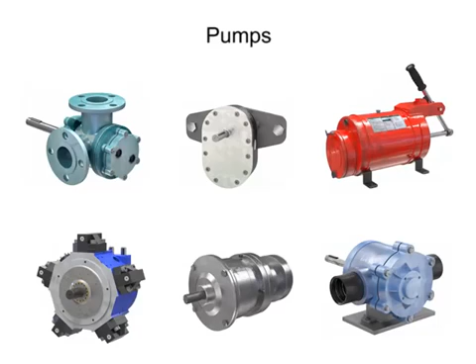Many different types of pumps exist to assist fluid movement in a variety of systems. An external gear pump uses two gears rotating against each other to provide fluid movement.

One gear is driven by a motor connected to a shaft. This is called the drive gear because it is driven by a motor, and it in turn meshes with and drives the movement of the second gear.

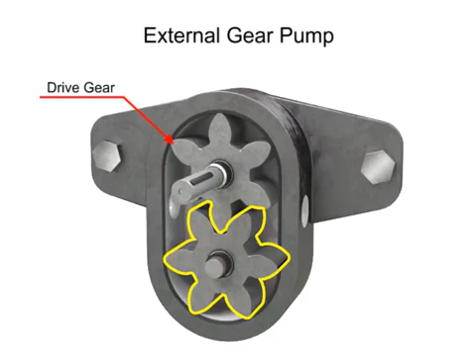As the gears rotate away from each other and come out of mesh, they create an expanding volume on the inlet side of the pump. This creates a vacuum at the inlet port, allowing fluid to flow into the pump.

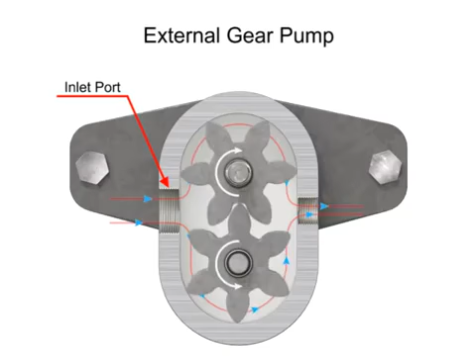Then fluid flows into the cavities and is trapped by the gear teeth. As the gears rotate, a flow path is created around the outside of each one. Fluid trapped in the slots between teeth is carried around and discharged into the cavity with the outlet port.

Meshing of the teeth in the center of the pump seals the outlet port from the inlet port. No fluid passes between the gears.

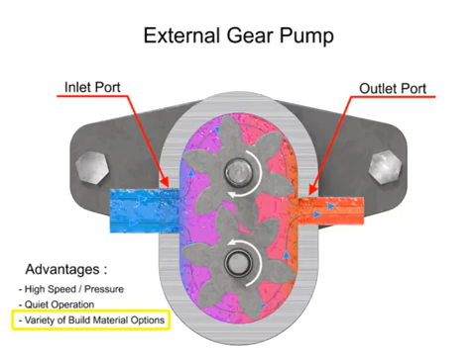The advantages of external gear pumps are their high speed and pressure, relatively quiet operation, and that their design accommodates a wide variety of materials. Disadvantages include bushings in the liquid area can become worn and that they have fixed end clearances.

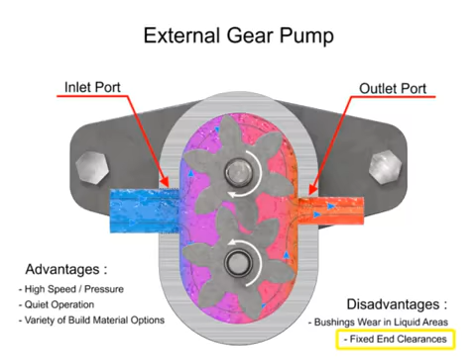Internal gear pumps are exceptionally versatile. This type of pump has one inner gear which is inside a second outer gear. The inner gear has a shaft driven by a motor and has teeth that protrude outward. The outer gear has teeth that protrude inward toward the center of the pump.

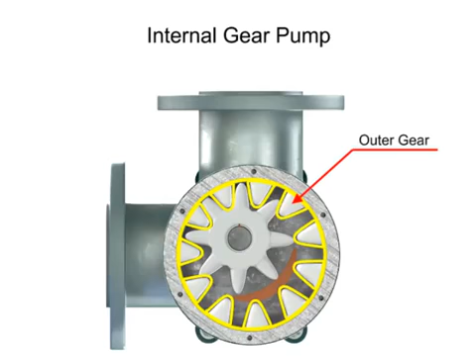As the inner gear rotates, it meshes with and moves the outer gear. Liquid is trapped in the gear spaces and carried from the inlet to the discharge. A stationary crescent-shaped divider separates the intake and discharge portions of the fluid.

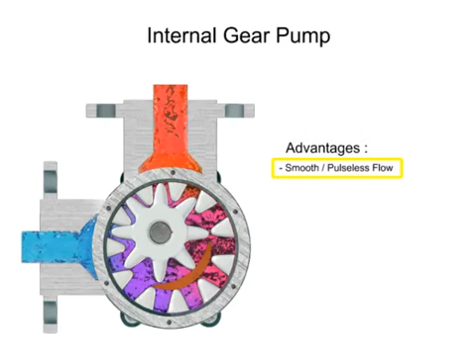Advantages of internal gear pumps are a smooth and almost pulseless flow, and slightly more horsepower for its size. Disadvantages are its higher cost, limited size range, low to moderate pressure ratings, and few sources of manufacture.

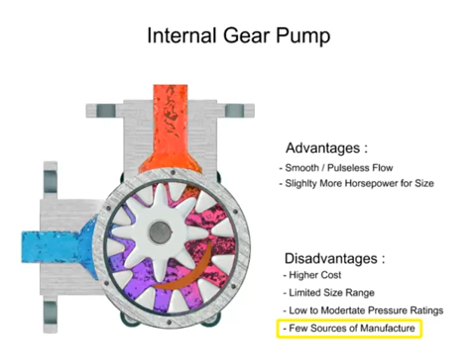A rotary vane pump is a positive displacement pump that consists of vanes mounted to a rotor. The vanes are on an off-center drive shaft. As the shaft rotates, the variable length vanes slide in and out to maintain contact with the pump housing.

The tension in the vanes is maintained by either springs or hydraulic pressure. As the vanes rotate, they create chambers of varying sizes within the pump.

Fluid enters at the largest chamber. As the vanes rotate and retract, the chambers get smaller, forcing fluid to exit through the discharge port.

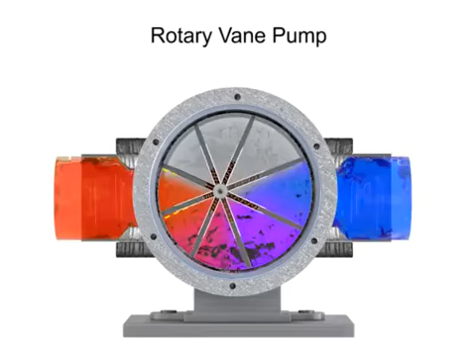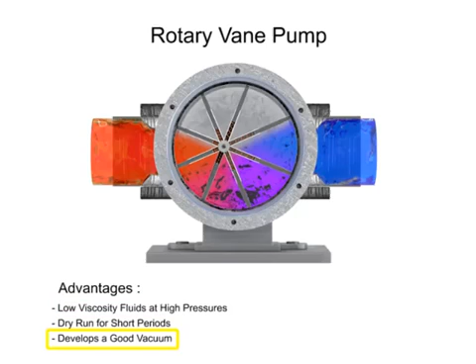The advantages of vane pumps are that they can handle low viscosity fluids at relatively higher pressures, can dry run for short periods, and develop a good vacuum. Their disadvantages include complexity and their unsuitability for both high pressure and high viscosity fluids.

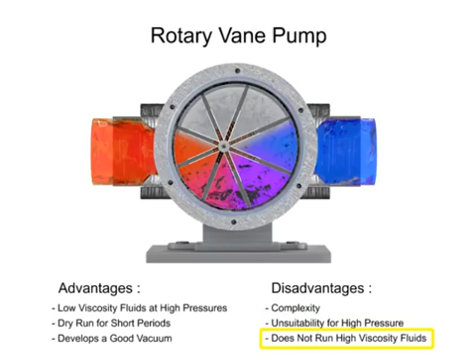Piston pumps come in many different forms. A swash plate is a device used to translate the motion of a rotating shaft into the reciprocating motion of a piston.

Swash plate piston pumps have a rotating shaft connected to a cylinder block containing pistons, which are pressed against a stationary swash plate that sits at an angle to the cylinder.

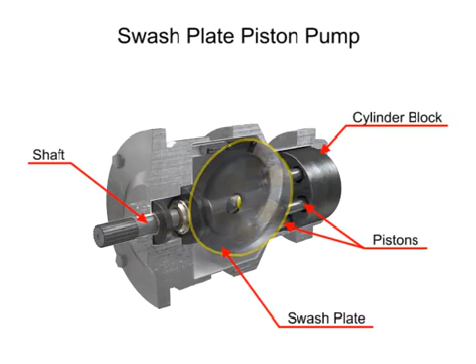As the shaft rotates, the pistons move against the swash plate, causing them to reciprocate within the piston block. The pistons create a vacuum that forces fluid in during half a revolution and expels fluid during the other half.

On the intake stroke, a spring ensures the pistons pull back and maintain contact with the swash plate, causing fluid to fill the empty cavity left behind.

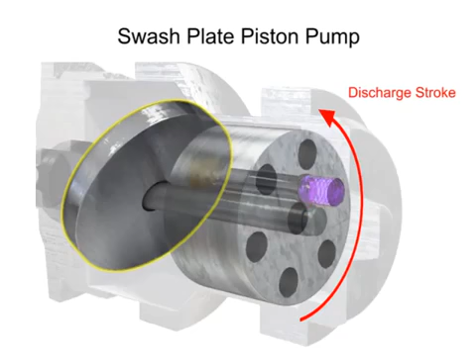On the discharge stroke, the angle of the swash plate forces the pistons back inside the piston block and discharges the fluid. The greater the slant on the swash plate, the further the pump pistons move and the more fluid they transfer.

Piston pumps, in general, are manufactured with closer internal fits than other pumps. This means that internal slippage can be less so that they operate with reasonable efficiency at pressures both too high or too low for the operation of other pumps.

Radial pumps are designed so the pistons stroke in a direction at right angles to the shaft.

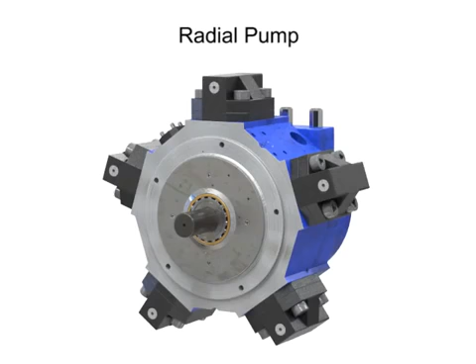The pistons are arranged like wheel spokes around a cylinder block with an eccentric central cam mounted on a drive shaft.

As the shaft rotates, the cam moves towards the pistons, forcing them down into the cylinder block and discharging the fluid. As the cam moves away, springs help retract the piston and cause the intake stroke. Check valves ensure that fluid only enters the inlet ports and only exits the outlet ports.

Radial piston pumps have a low noise level, very high loads at low speeds, and high efficiency.

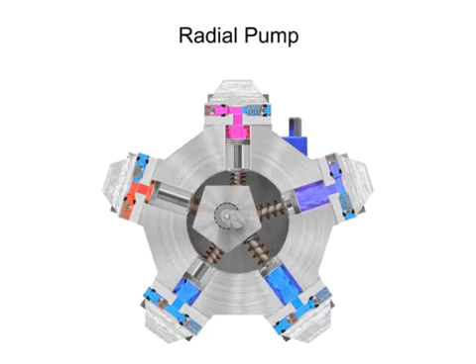Hand pumps are used when a source of power is not available or where the extra expense of a power pump isn't warranted. For example, they are used on shop presses and other portable equipment, serve as standby pumps, and serve as sources of emergency power.

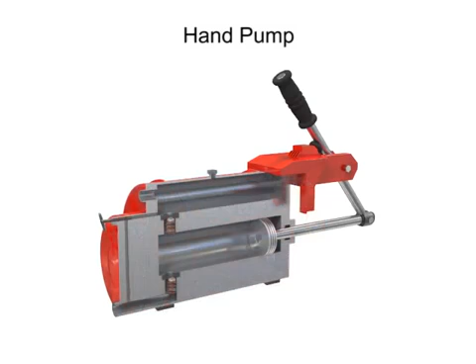Hand pumps are always of piston type and are usually constructed with a piston working between two check valves.

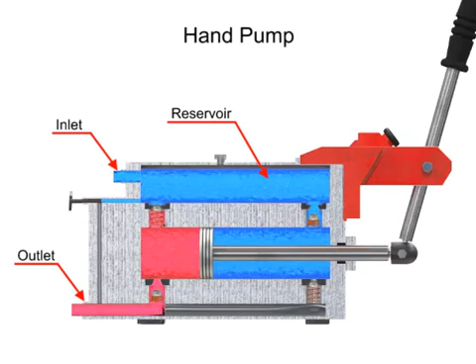Double-acting hand pumps are more efficient, allowing fluid to both enter and discharge on both strokes of the piston. Moving the pump handle in either direction allows fluid to be drawn in from the reservoir and discharged via the outlet ports. Check valves in all locations prevent fluid backflow.